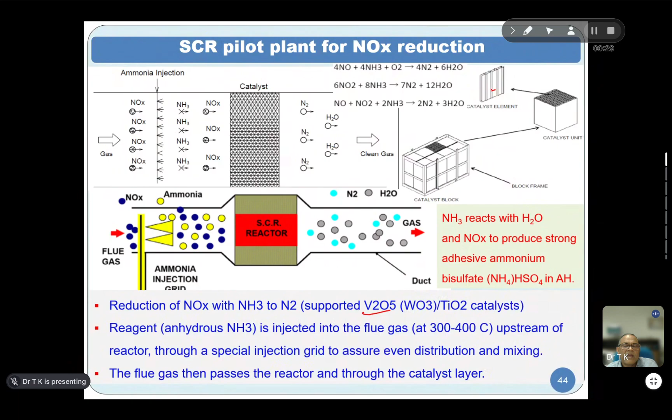When the catalyst gets eroded, ammonia slipping takes place, and this slipped ammonia reacts with sulfur trioxide in the flue gas, producing an intermediate compound called ammonium bisulfate, which is a sticky substance. This deposits on the small heat transfer elements in the air preheater, making the plant ineffective and not capable of operating, essentially choking the air preheaters so we are not able to run the plant.

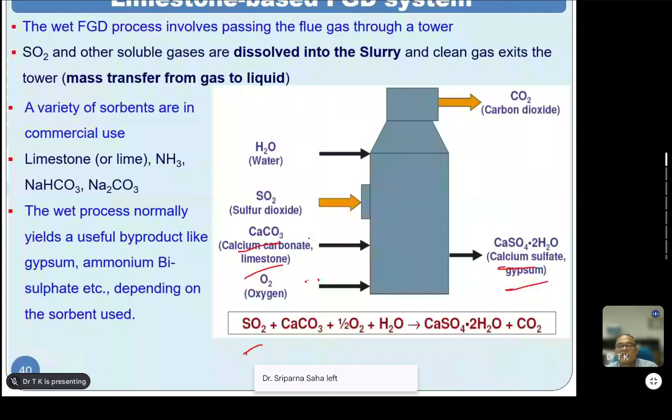So that is the reason we have represented this to the ministry and appealed above this value. What was that value? 100 - so this 100 NOx value is not achievable. We have represented this, and probably it is going to be revised to 300, which is somewhat possible by staging combustion. In our new boilers, which we have already ordered, we are giving the limit as 300, expecting that this limit will be revised.

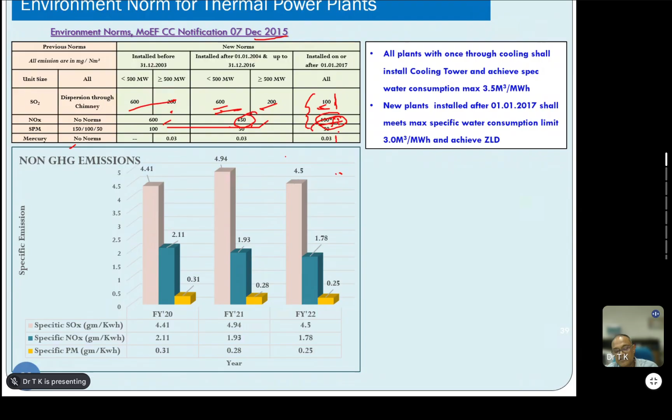So, this is about NOx control. For SOx control and NOx control, we have taken actions on these two, for the emission control of these two pollutants.

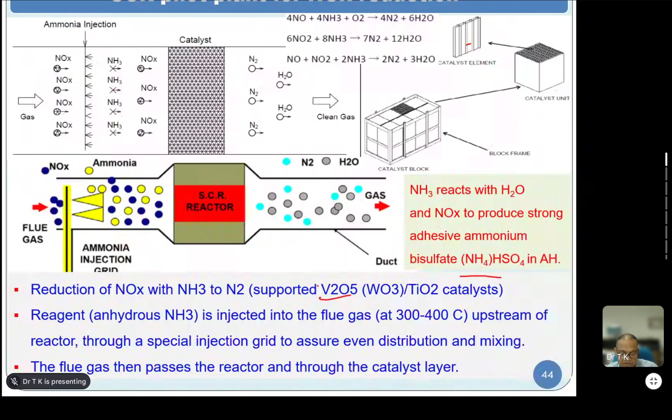Any comments, sir? Any views on this? Okay. Shall I proceed? Yes, sir, yes sir, you may. Okay, thank you very much.

On carbon capture and utilization systems, we have done a few pilot projects, not on a large scale. We have made some pilot projects for capturing CO2 from the flue gas stream and converting it into methanol, which is fired back into the boiler. The CO2 is captured from flue gas.

We are using amine solutions to capture the CO2. It gets absorbed in the solvent, and then by heating we remove this CO2, which is then reacted with hydrogen. In the pilot plant, we are producing hydrogen using solar power, which involves electrolysis of water and consumes a lot of power. By hydrogenation of the captured CO2, we are producing methanol, which is fired back into the boiler.

In some of our plants, we are proposing to produce urea also by using this CO2, reacting it with ammonia. Ammonia is produced via air separation to get nitrogen, which then reacts with hydrogen, and that ammonia will be used along with the CO2 captured from the boiler exit flue gas. This is another pilot plant we are planning, but it is not yet operational.

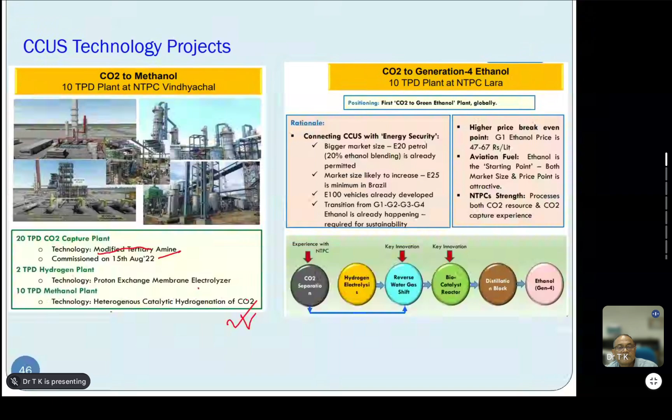Another area where we are working is biomass co-firing. Biomass is considered a carbon neutral fuel. The UNFCCC has declared or accepted that biomass is a carbon neutral fuel, and we are all aware of this issue because I am a victim of it myself.

I live in Noida, in the NCR, and particularly during November, December, and January, the entire city gets choked because of stubble burning on farms, done by farmers particularly in the Haryana region. They burn the stubble, the residue of paddy and so on, which leads to generation of huge carbon dioxide and other pollutants, creating a very serious situation in the entire national capital region.

There is enough agro residue available, with huge potential. So we have started biomass co-firing in our existing boilers with some minor changes in operating practices, because biomass characteristics vary highly depending on the source, but it has volatile matter of the order of 50 to 60% and high moisture too. Torrefied biomass, though more expensive, has characteristics somewhat nearer to coal.

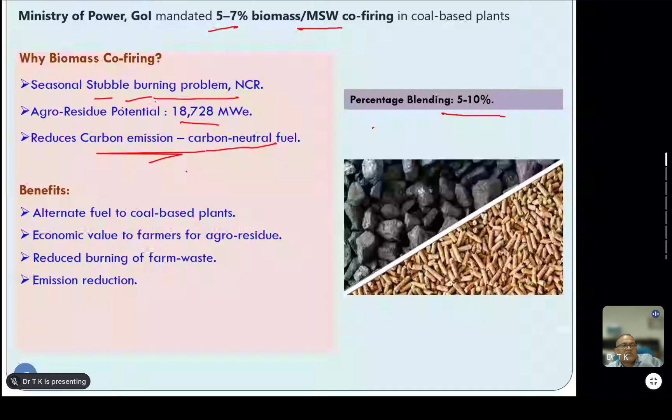As of now, we have test-fired up to 10% biomass in many of our boilers, and it is mandated that 5% biomass and 2% municipal solid waste - charcoal produced from MSW - or 7% biomass alone, be used. Many of our plants, 19 right now, are firing this, and the remaining plants are starting this operation. This biomass co-firing, up to a certain percentage, will not only provide a solution to the stubble burning problem but also provide a substitute fuel in all coal-based plants.

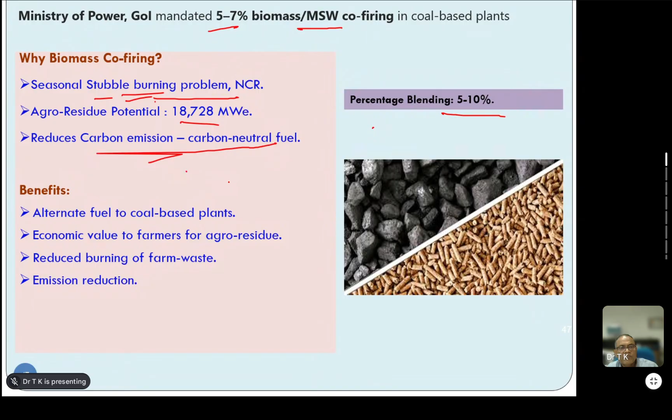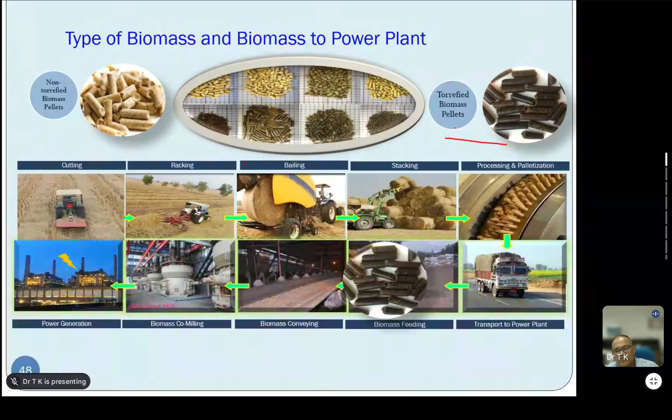And types of biomass, what we are getting from different sources. For this the properties, particularly these heat values and VM percentage, vary widely. But we have set up a few plants also internally inside the plant, small capacity plants for production of torrefied biomass pellets. Okay.

And we are also using this municipal solid waste charcoal. There are a few plants in Varanasi, Bhatinda, in northern regions; a few plants have already been set up to produce torrefied charcoal from municipal solid waste, and that we are firing. This also we have test fired in some of our small capacity boilers. In one of the smallest boilers, 110 megawatt boilers, we have fired this MSW charcoal up to even 40%.

So MSW charcoal, if it is a torrefied one, its characteristics are more or less similar to that of coal. So there is not much problem, but then production is an issue: the segregation of the wastes and then converting into torrefied charcoal. There are some challenges in it, but once it is available, firing it in an existing boiler is not much difficult.

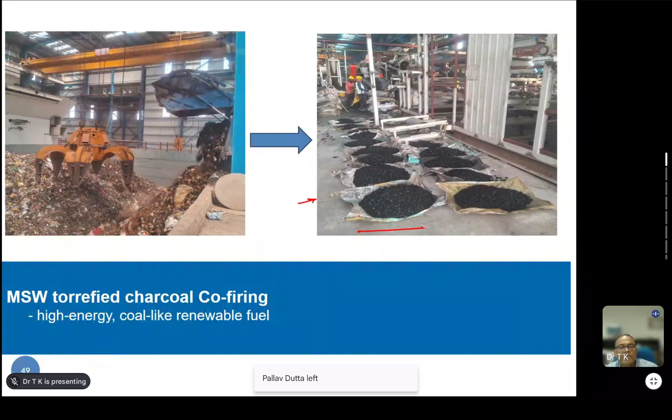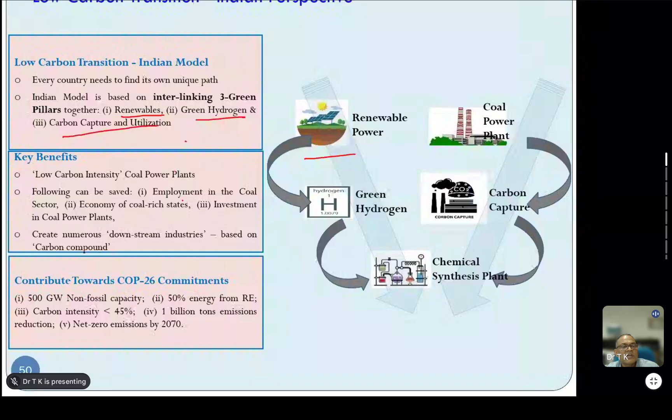Okay, so what we are aiming is that for low carbon transitions, renewables capacity has to increase, and then green hydrogen, a lot of work is going on in this field, and then carbon capture and its utilization. We have done only some pilot projects. And for reducing this carbon intensity, other than increasing the renewable capacity, we'll have to go for cleaning of the existing coal plants or reducing emission from the existing coal plants.

So this is how we are planning to achieve our 2070 net zero, and the short-term target by 2030, carbon intensity reduction by 45% and emission reductions. We are working towards that. But for this 50% energy requirement from RE, I think there has to be a significant increase in storage capacity, which needs some development in energy storage technology probably.

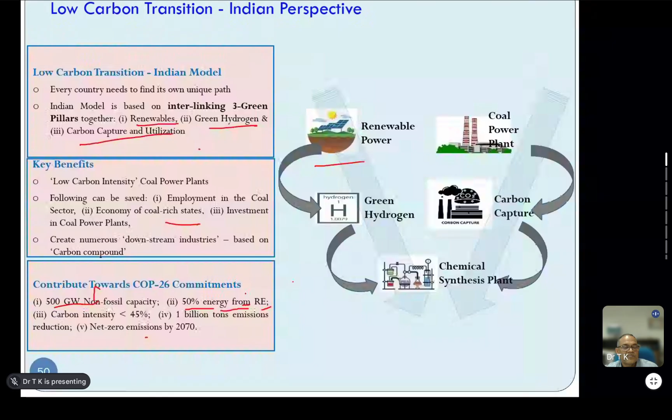And also leveraging advanced technologies; for further improvement and analysis, the objective of the program is directed towards utilizing AI/ML to make the process more effective, to reduce emission and to meet energy security. Okay. So this is how we are aiming to achieve this net zero target.

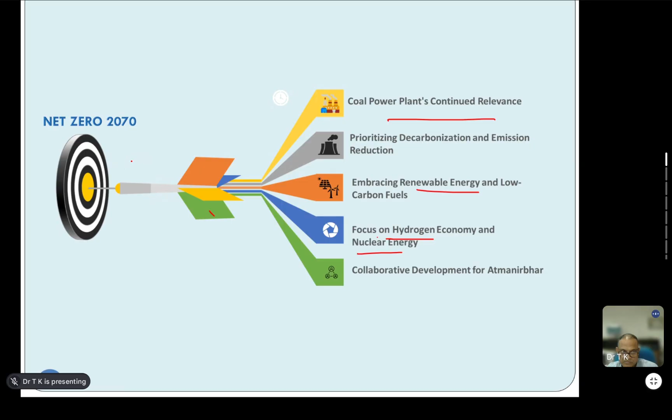Coal power plants' relevance will be there, and then nuclear power plant capacity for baseload operations, the increase in renewable energy capacity, and the hydrogen economy. We have new cells to develop in this field, and then collaborations with all our partners. This is how we are aiming towards achieving net zero as committed to UNFCCC by 2070. So thank you very much, and I would be happy to listen to your comments, sir.